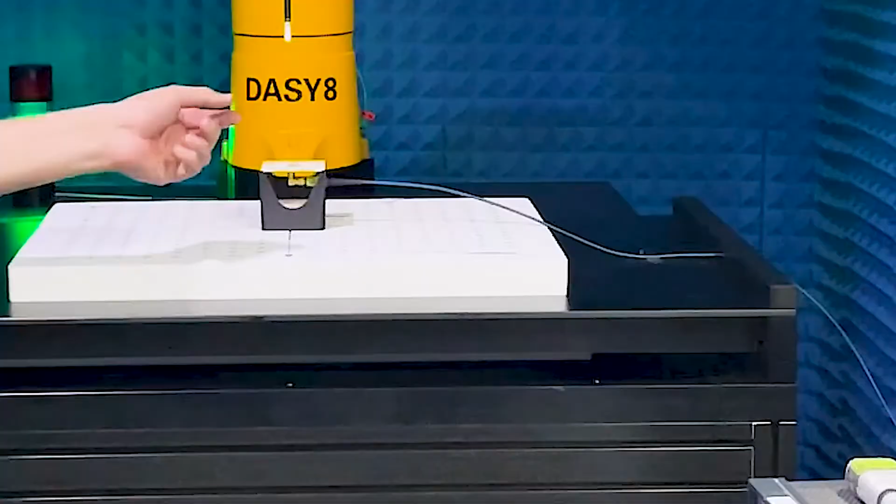Until now, compliance testing of Wi-Fi 6E with DASY 8 or 6 has been cumbersome, as the compliance distance of 2 millimeters is much smaller than one-fifth of the wavelength. One-fifth of the wavelength was the shortest distance that the plane-to-plane phase reconstruction of DASY 8 Module mmWave version 2.0 was accurate for. As probably all of us noticed, the workaround offered by SPEAG was not really satisfactory.

As previously announced, SPEAG teamed up with its R&D partners Zurich MedTech and the IT'IS Foundation and developed two completely new solutions, namely for incident power density and the absorbed power density. In this video, I will now test if this new Module mmWave 3.0 has solved the problems of the previous versions, in particular the limitation with respect to the closest distance and the restriction to planar surfaces.

The new feature of DASY 8 Module mmWave version 3.0 is based on latest research results on the equivalent source reconstruction algorithm. The new method is based on a novel multipole source reconstruction algorithm and has recently been submitted for publication. In the manuscript, of which I have received a copy, it is demonstrated and validated that the algorithm is accurate for very small distances in terms of wavelength and allows to evaluate, for example, surfaces on top of which the camera module is evaluated. The new method also allows to assess the exposure inside concave surfaces such as in the goggles.

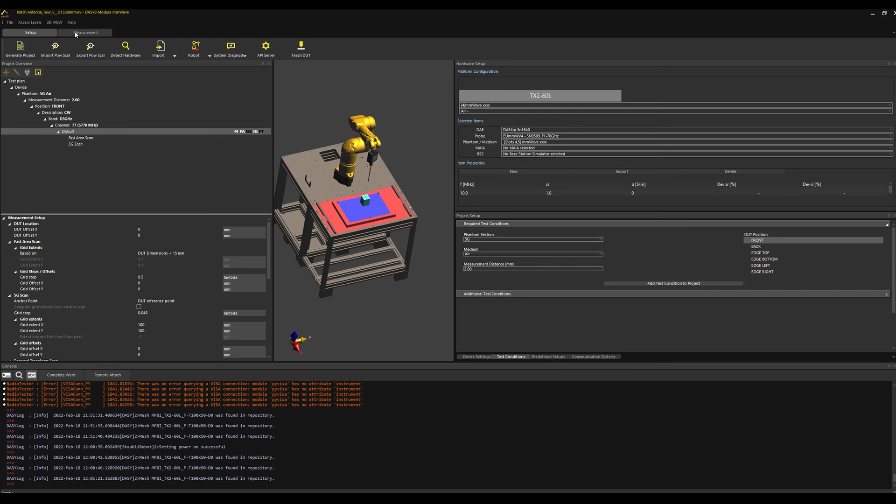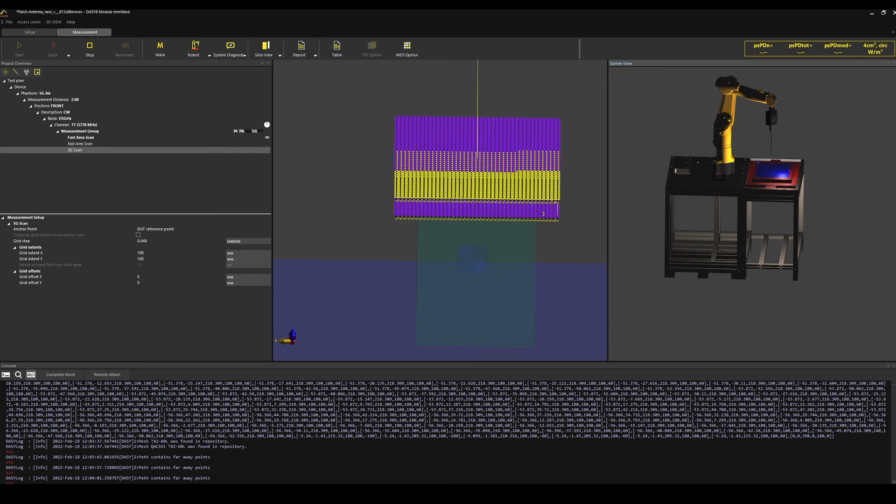The project setup in DASY 8 or 6 Module mmWave 3.0 consists of a fast area and 5G scan at 2 mm from the surface. The equivalent sources algorithm is enabled from the preferences. The other settings are left to default values. I start the measurements and accelerate the video. The fast area and 5G scan measurement grids with this algorithm are similar to the previous versions, i.e., the scan times are the same and do not increase if the new algorithm is used. So the scan is now finished and the equivalent sources reconstructed.

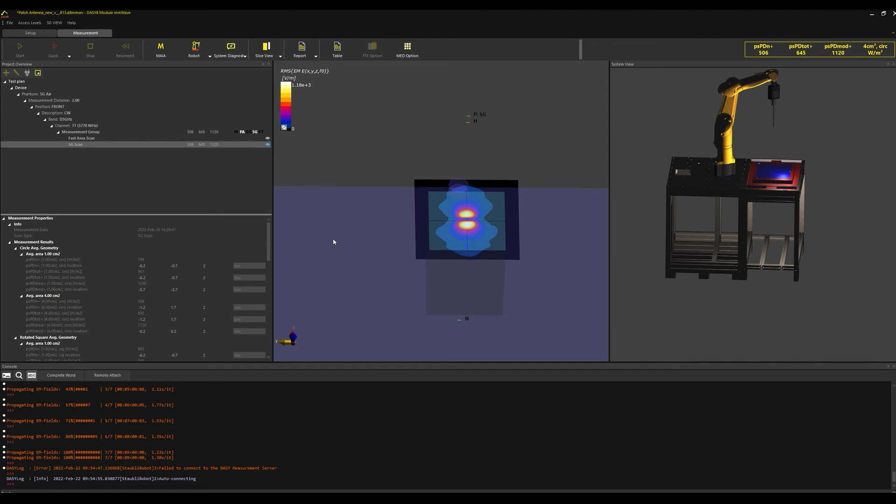The total peak spatial power density value is 961 and 645 watt per meter square, corresponding to 1 and 4 centimeter square averaging area. This is only 0.6 dB from the simulation values. The new algorithm definitely performs better and provides much lower uncertainty for the bands below 24 GHz, where the evaluation distances are less than lambda by 5. However, this is not all.

The most exciting new feature is that by computing equivalent sources out of my DASY measurements, the mmWave module allows me to have effectively a full digital model of how the device under test radiates under the tested conditions. And this digital model is portable. All the information is encapsulated in a single file. I can easily export it out of DASY and import it into my Sim4Life simulation software for more analysis. Here is how it looks like.

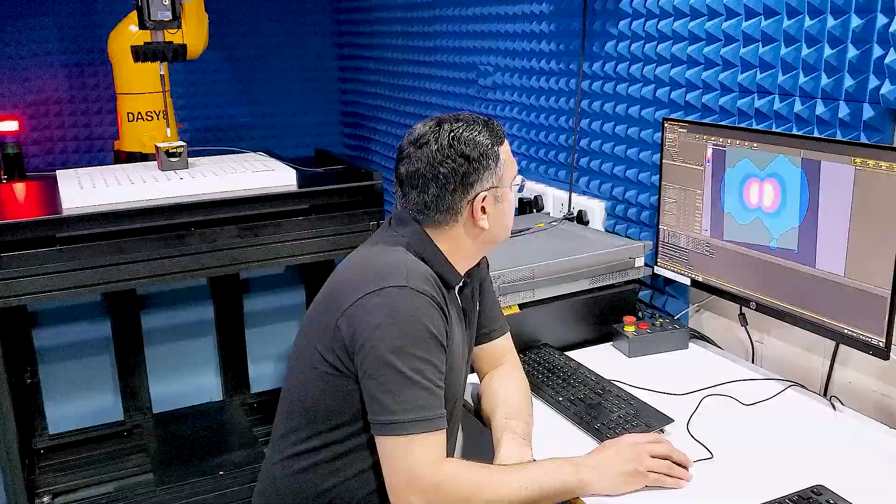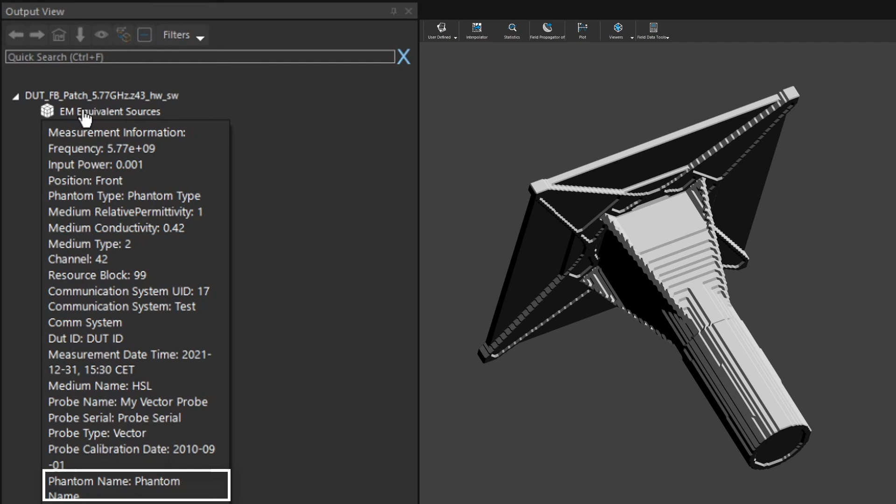When I import the file created by DASY into Sim4Life, I can easily see the geometry of my DUT and some identifiers so that I can always trace the file back to the physical device. The important thing is that this will make validation of the numerical model obsolete. For example, I can place my DUT in different virtual scenarios: next to a hand phantom, next to a full body phantom, oh boy, next to a high resolution anatomical model such as Duke.

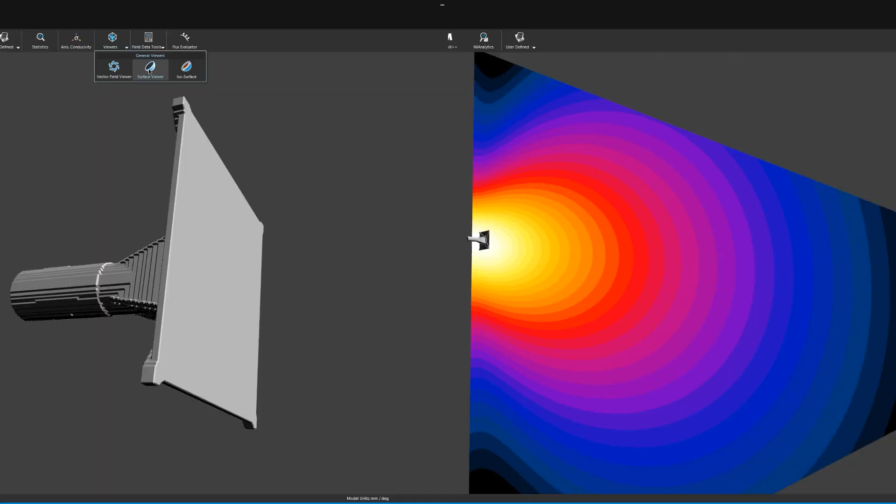Within a few seconds of post-processing time, I can easily propagate the radiated fields in free space and compute, for example, the incident power density in those scenarios. It is very flexible and powerful, and I like how I can actually use the data that I have just measured. What I cannot easily do, it seems, is use these fields as excitation sources for the different electromagnetic solvers, for example, to simulate the absorbed power density or the specific absorption rate. I am sure SPEAG is already working on making that feature more accessible.

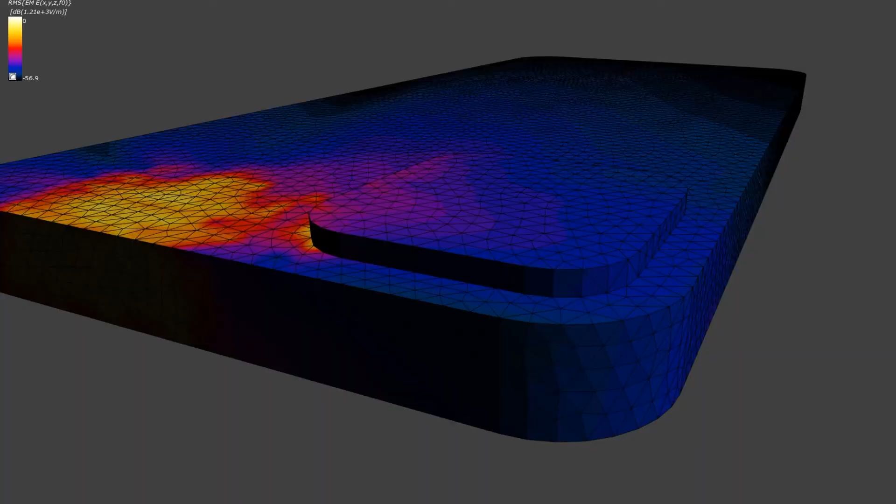The new field reconstruction algorithm in the mmWave module addresses important issues such as evaluations closer than 1/5 of the wavelength, measurements on non-planar surfaces and concave surfaces, replacing simulation models with measurement-based models. It is great to see that SPEAG continues to leverage its expertise in both hardware and software solutions for mmWave compliance testing. Being able to use measured data in my simulation software offers a whole new range of possibilities, either for increasing the confidence in results or for exploring scenarios that are out of reach of measurements or simulations alone. This is already a huge step, and I am excited to see what comes next. In my next video, I will demonstrate how to measure the absorbed power density of this antenna.